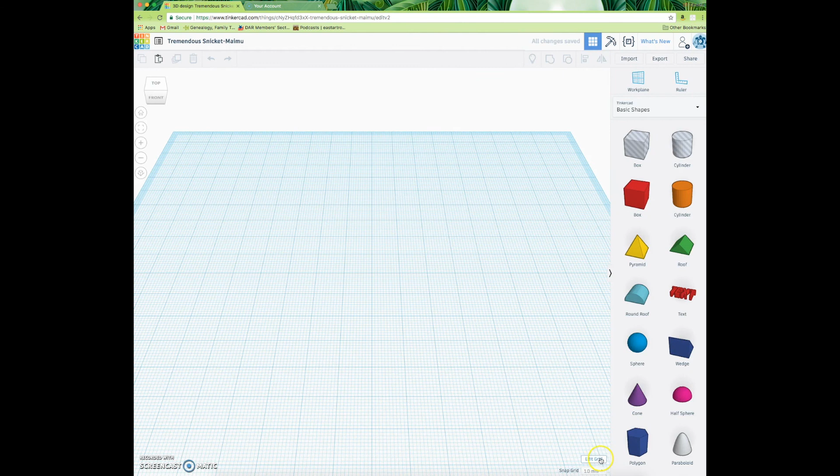First, once you log in, click on Create a New Design. This will give you a blank working surface. This surface is your work plane, but we don't want it in millimeters. We'd like to have it in inches.

When you're working on your templates, remember we have a specific width and height: 3.5 by 2. If I enter 3.5 by 2, you'll see I have a nice rectangular work plane. This is the limit of the space you may print on.

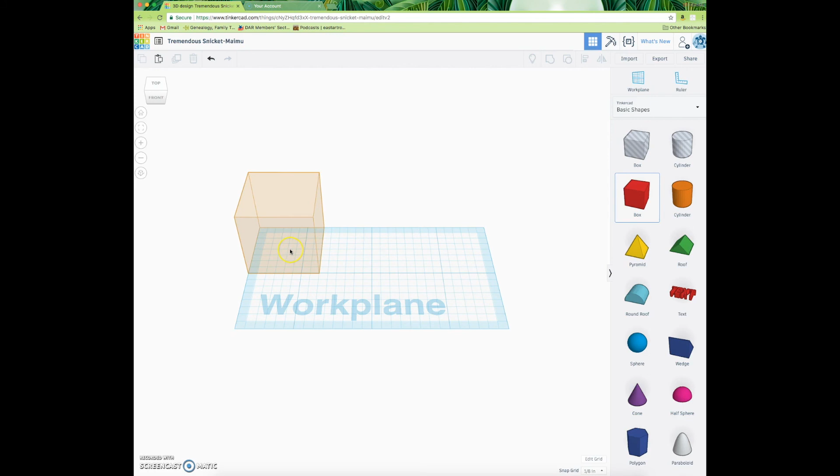Now we need to create a surface on that plane for you to put your template on. Think of it as the paper you're about to draw on. You're going to click on the cube and place it in the corner of your workspace.

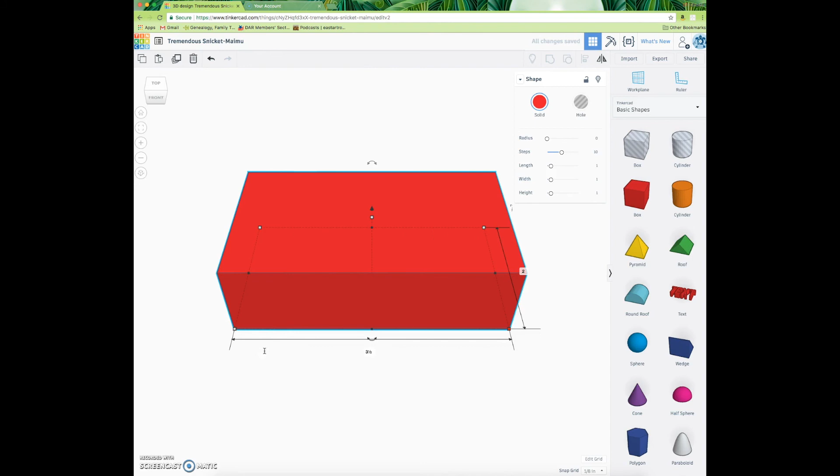Now you'll notice if I enter the numbers by hand by clicking on the sizes, I need to be careful to put my 2 by 3.5 in the right spaces. Now it's the same size as my work plane.

I want it to be a lot shorter though. When we're printing today, over here it's going to tell you how tall or how high this work plane is. We only want this to be 1/8 of an inch at the most. You could also do 1/16 of an inch.

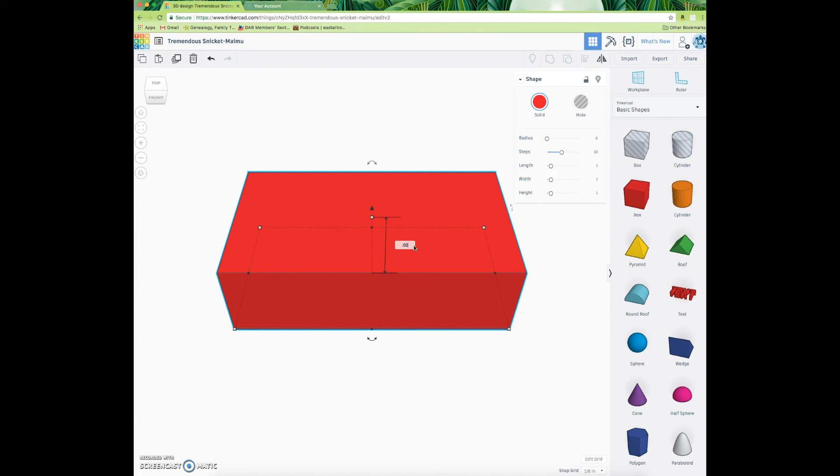Unfortunately this program won't let you put in fractions, so you have to put in decimal places for your fractions. Make sure you go in here and make it 0.0625. And if you're careful with your mouse, if it has a scroll button, you can scroll in and out

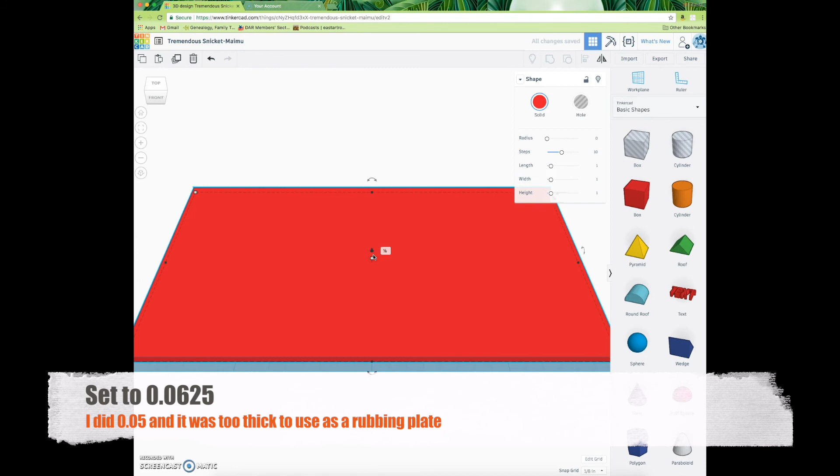for your zoom on here to check out your work plane. You can always click on this arrow to pull it up off the surface for future reference, but we don't want to do that today. We want to keep it flat on that work plane where it started.

So be careful about pulling this button the wrong direction. If you pull the square, it'll make your work plane a little bit thicker. So we're going to go ahead and pull it up a little bit so it's a little thicker.

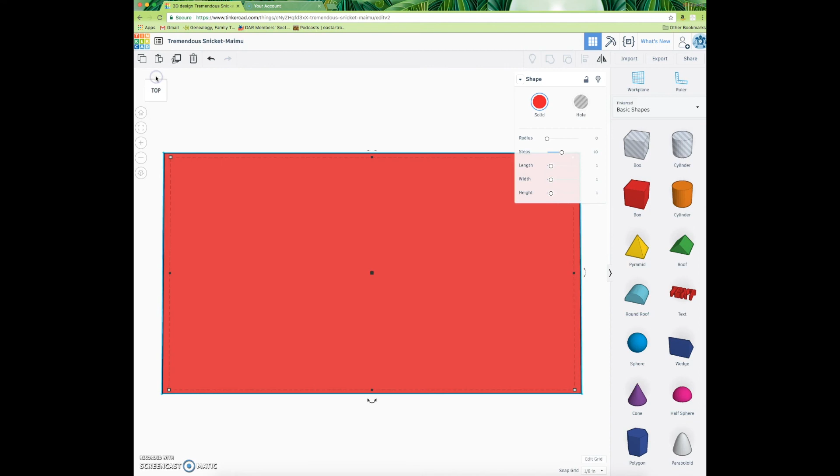This box up here will show you the different sides of your three-dimensional surface. It'll show you all 4 sides, the top, and the bottom. When you want to go back to the original view, you just click on Home.

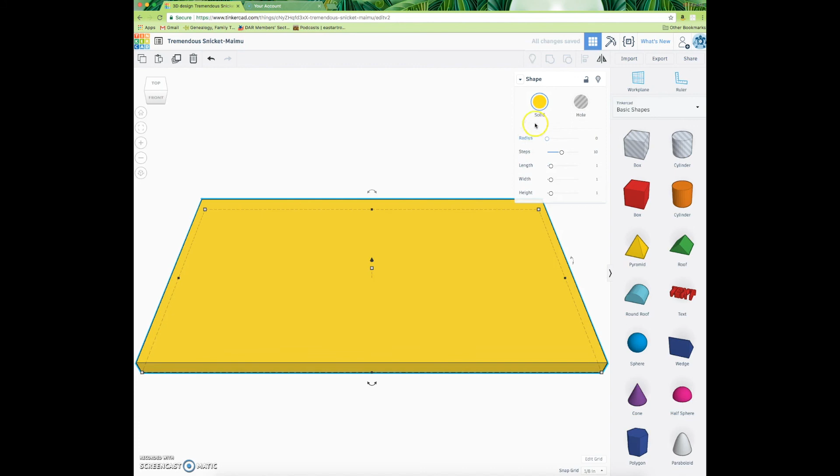If you don't have a scroll button on your mouse, you can also use the plus and minus buttons for zooming in and out. You can change the color of your work surface at any time by making sure it's highlighted and then changing it up here in the color palette. The color you make it here has absolutely nothing to do with the color it prints out in the printer. It's just showing you your different spaces.

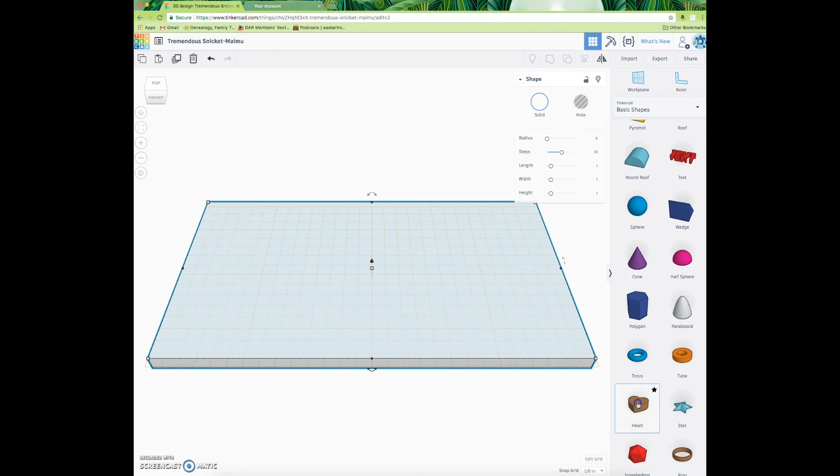Now if I want to begin making my texture plate, I need to make sure I add another work plane on top of the shape I just put on here. Remember I put a form on here with this cube? I need to make sure I put a work plane on top of there for my new shapes to stick to. Think of it like the glue that holds your project together.

So I am going to choose to make a texture plate with hearts on it. I want to be careful I don't accidentally grab this down here, but I notice it seems like it's a little bit off on the corners. It's not quite on my work surface anymore.

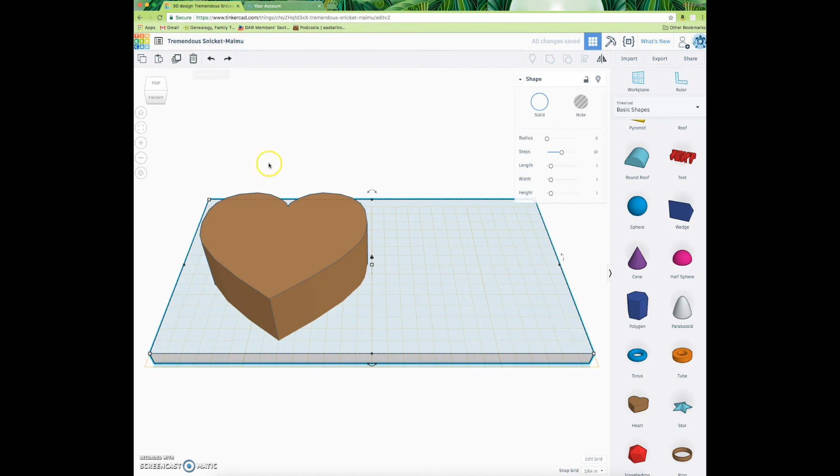If I look over here, I can see my numbers are moving, and those should be 0 and 0 when I'm working with this project. So I want to go up here and make sure it's just in the corners. I'm going to go back over here.

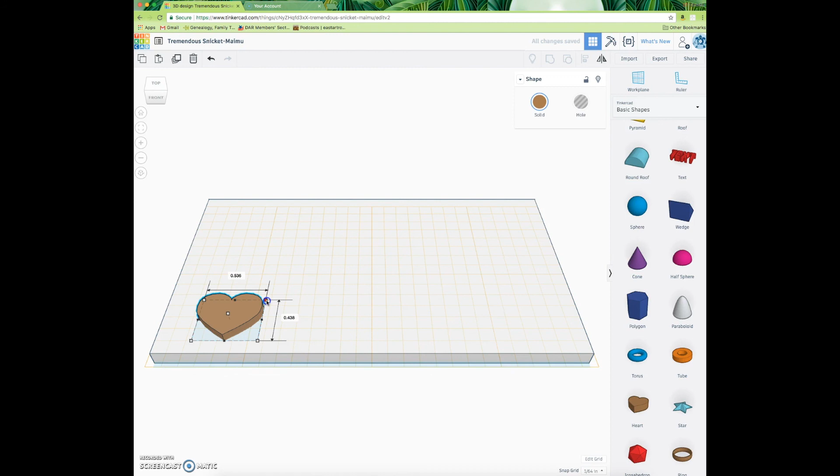Now my heart is going to be the same as the cube that I just did. I don't want it to be super high. If kids are using these as rubbing plates where they put the paper on top and then do a crayon over it, if they're really high and bumpy, it's going to tear the paper. I want to keep them really shallow, so that 1/8 of an inch again, and then I want multiple hearts on this surface.

I'm going to shrink it down a little bit to a smaller size, just like cropping and adjusting photos. If you already have something on the surface and you want to make an exact duplicate of it, you click on the duplicate button and it'll blink. You won't notice anything until you drag and drop that exact duplicate next to it.

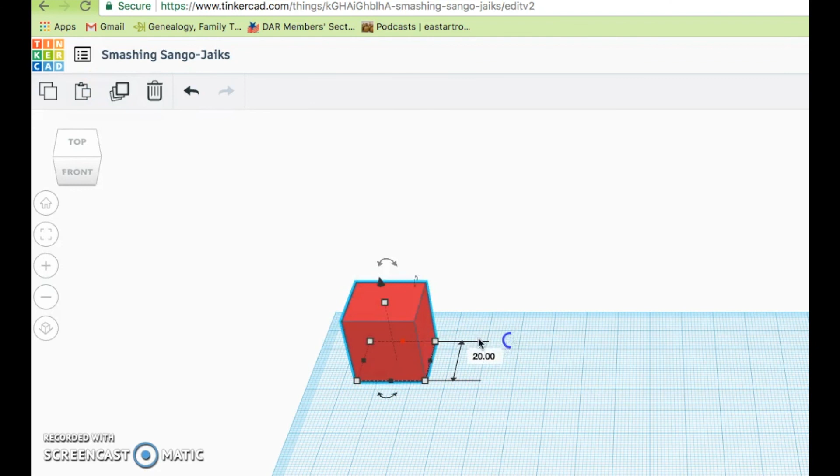If you ever don't like an idea, you can always undo the move or undo the copy. Likewise, you can always throw something in the trash.

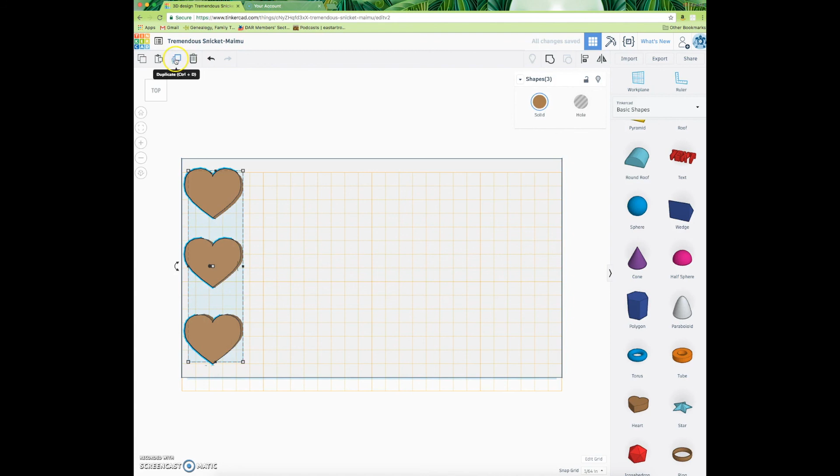I can do that for the first row, and then instead of doing it one by one, if I'm going to make a repeating pattern, I'm going to move these so they're a little bit more evenly spaced from each other. I'm going to click on all 3 and hold the shift button down so it gets all 3, and then copy and paste those again.

Now I'm going to do all 6 of them, copy and paste, and drag them where I want them to be. This is much faster than trying to do 15 different individual hearts and making sure they all line up. I can line them up a lot faster this way by copying and pasting.

So now I have a texture plate really formed. If I look, my edges aren't quite the same, but there's a big gap between the second to last column and the last column, so I'm going to highlight all those and move them over just a little bit.

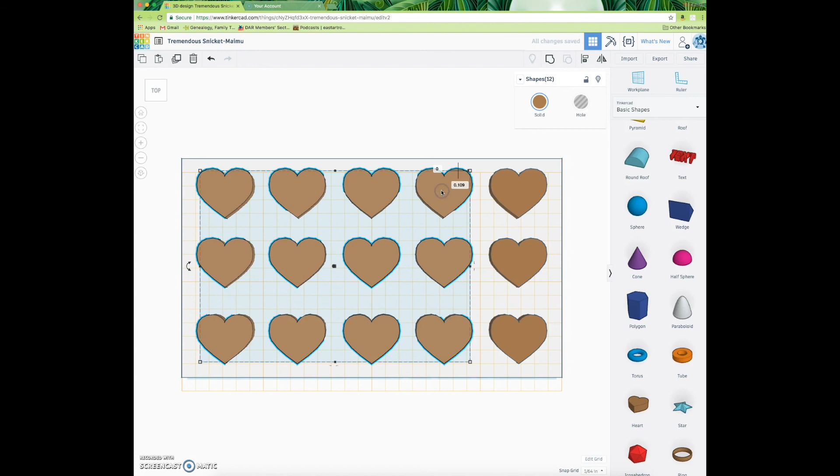Just drag it. I'm going to try and get the same distance on all sides, all the way around. If you look, it's just about a square's width from the edge, so all of these are more or less lined up.

Now, they're not perfect. If you want yours to be perfect, you can use the grid, but mine are close enough. Now I am going to turn this to all the sides, and I want to check and make sure those hearts are on the work plane.

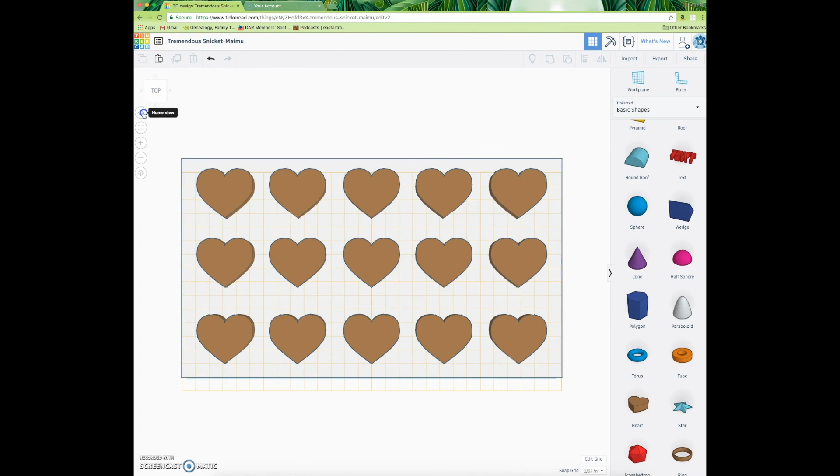I want to make sure they're not floating above it, because that can happen if you're not careful. If they're floating above the work plane or into the work plane, they won't print correctly. So you always want to double check all the way around.

Now that I have this plate done, I'm going to go up to the top and export this, or save it, or share it, depending on what we're going to do in class. You want to export everything that's in there—we're at that level right now. When I export it, I want to make sure I'm sending it to my desktop someplace.

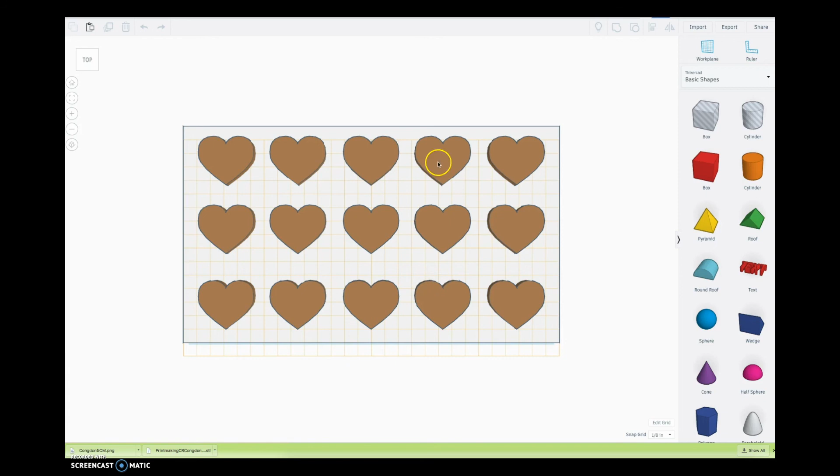When I click on that link, it takes me directly to your file where I can take a look at it and make sure it's ready for me to export in the file format that I need to print it on the 3D printer.

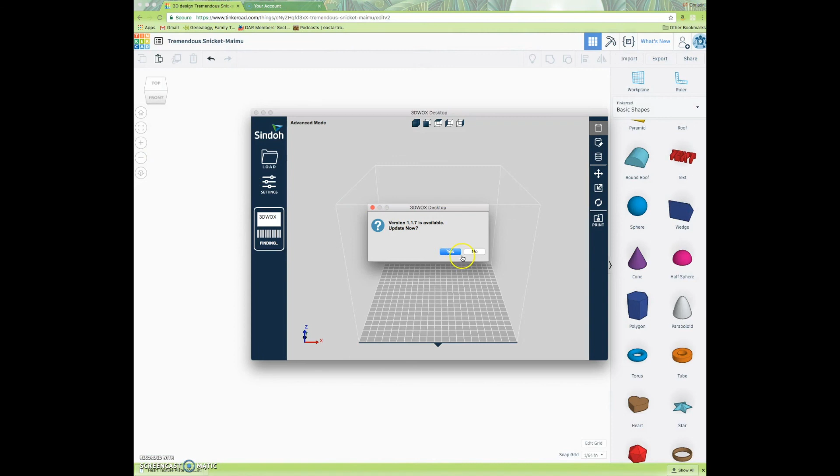Once I receive your file and check over it, I'll open the 3D printing software, and I'm going to export that file into a format that the printer can read. I'll load it up to the 3D printer.

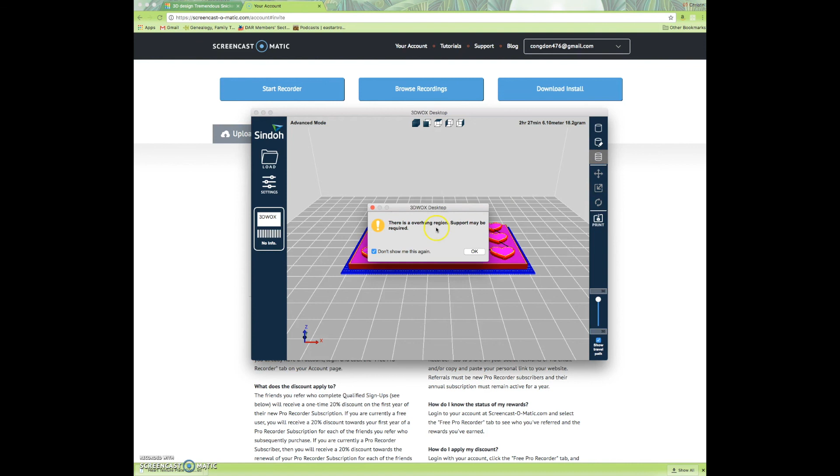Once it's in that 3D printer model, I can go through and check to make sure there aren't any errors. I can zoom in, look to make sure everything's attached, and ask it if it needs any additional supports. At this point, your texture plate should not need additional support.

I'll check through every layer the printer is going to print. I'll start at the bottom, just like the printer would, and it'll build it up like this. I can check to make sure everything's there, and then I can click print.

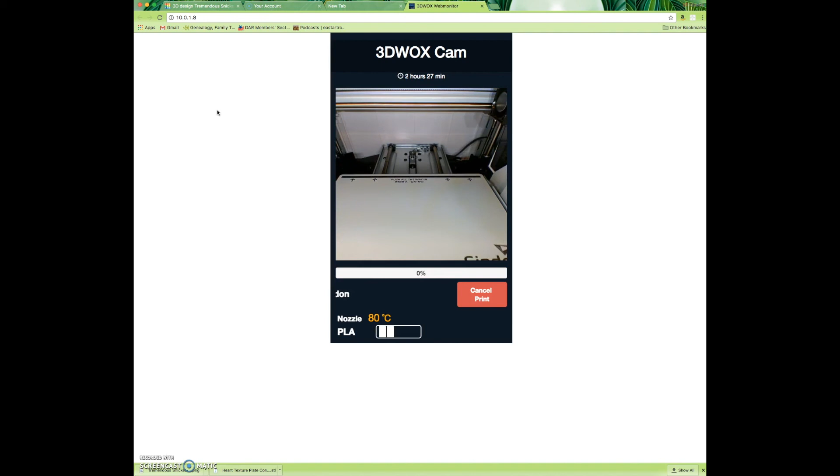After I click print and send it to the printer, I have the option of pulling up a live camera view on my desktop that I can put up on the smartboard when we're not using it, and you can actually watch the printer warm up and get ready to print your item.

If we look at a conversion of Celsius to Fahrenheit, you'll notice it's at 200 degrees Celsius, which already sounds hot, but if we convert that to Fahrenheit, that's 392 degrees Fahrenheit - that's like my super hot glue gun that I use for you guys.

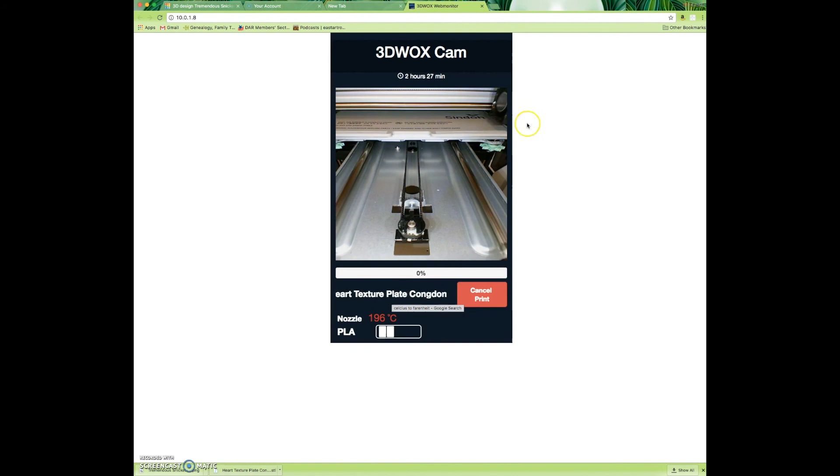Once it heats up to that certain amount, it will start printing on the 3D printer. It has to lay a base first, so it's going to be an extra tiny, super skinny piece of plastic that you will peel off of your toy once it's finished printing.

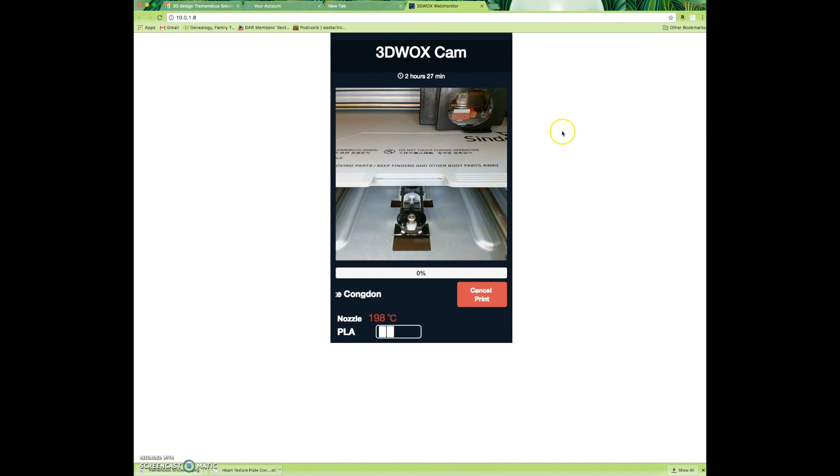If your toy is more three-dimensional than a texture plate, we will also add supports that will peel off of it after it's finished. This may necessitate you using some fine grit sandpaper to smooth it out.

You'll notice it starts with the edges of that texture plate that we already defined, and then it goes through and starts filling them in. You'll notice the top of the screen tells you this is a 2-hour and 27-minute print time.

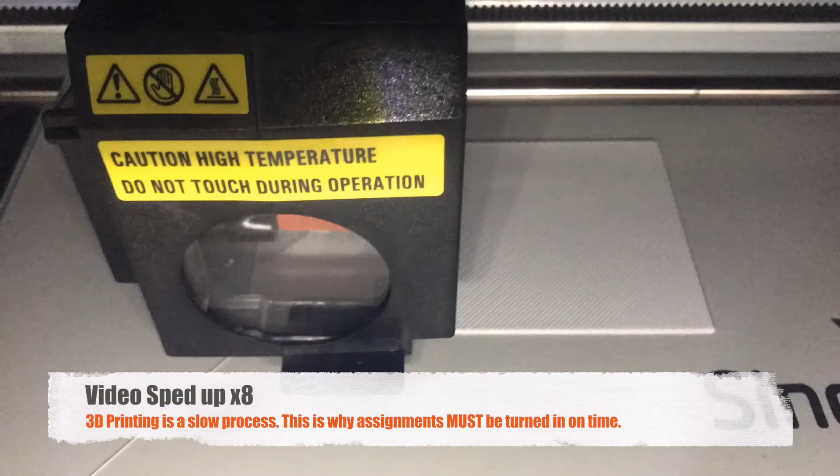That's how long it will take this machine to print each and every one of your designs. So you can imagine it's very important to get those in on time.

Once it's finished, I can peel it off the magnetic backing, which just sticks itself to that metal plate, and I pull off the original start line here. Remember, I have to push this all the way back in, just like the instructions are telling me to.

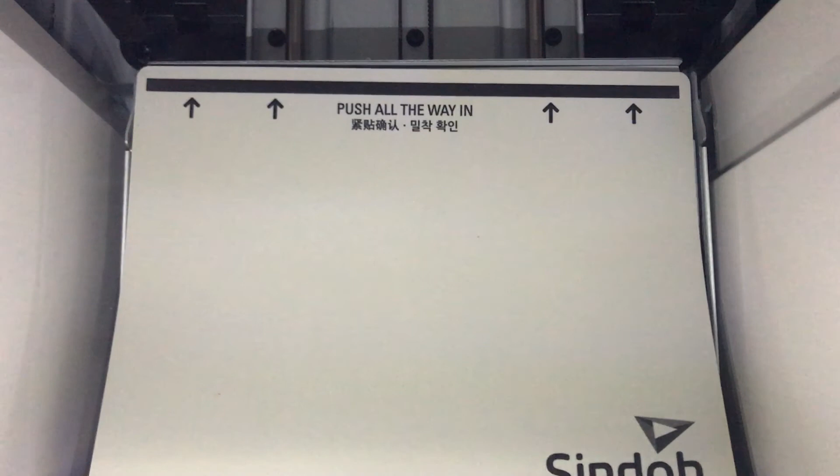You'll see that your texture plate is fully printed. It has some natural texture. Here's that extra backing I said you're going to have to peel off of it.

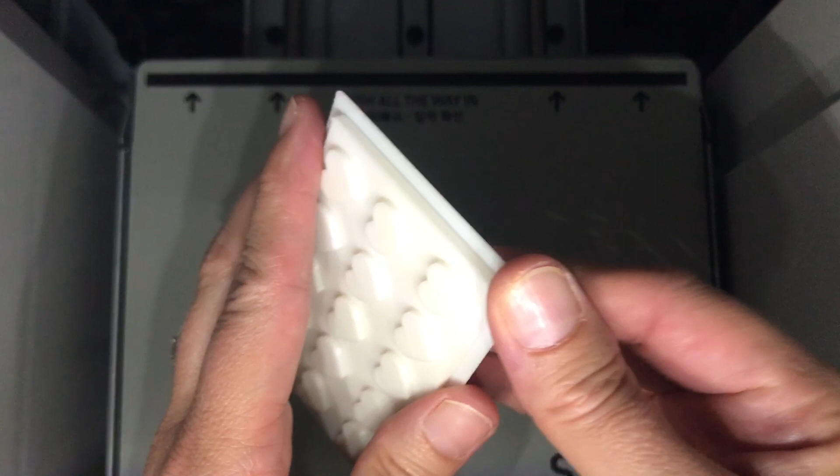You just gently pull the two apart from each other. You might want to go all the way around the edge to make sure it doesn't accidentally break your plate. But you'll just peel it off and your texture plate's finished.

You can see all of the different print lines and marks. You can look at it all around, way around the edges just like you did before. Great job!